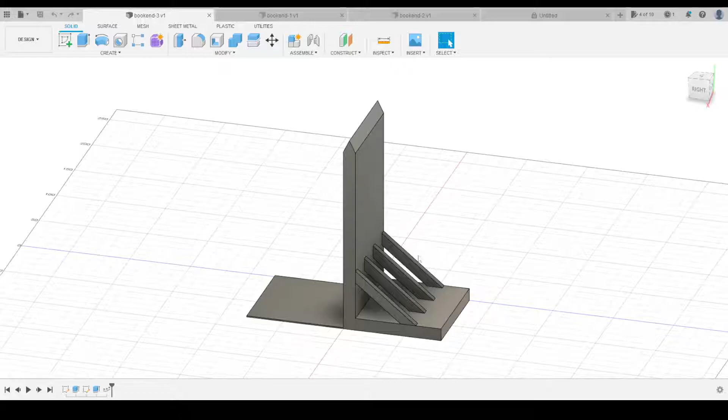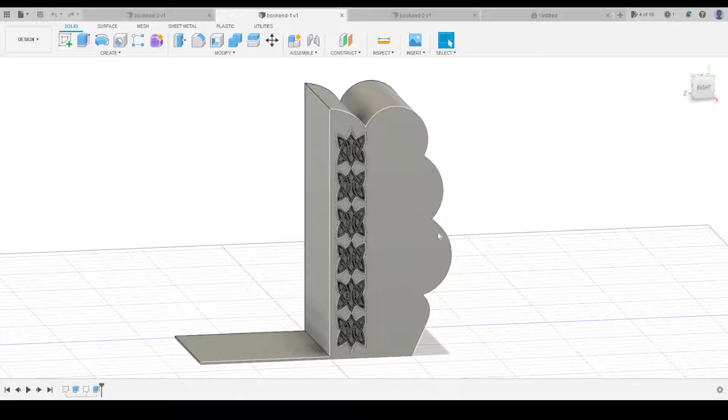I got some rectangles and squares punching out the side. This one kind of looks like a cloud. It's really just about making it big enough so that it can fit the SVG design.

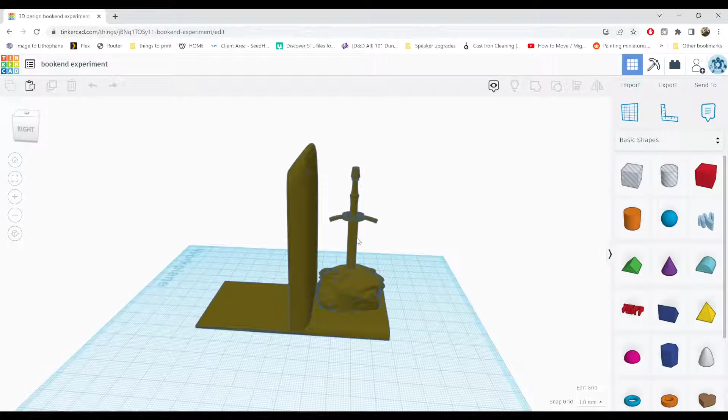We're going to start off with design number one. Keep it the most basic to start.

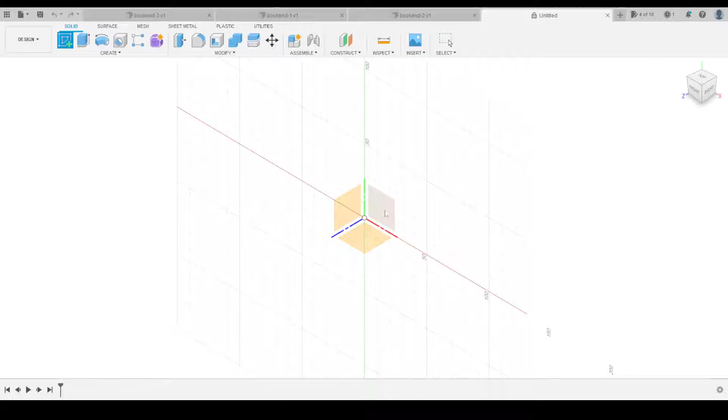So with Fusion 360 launched and at the basic starter screen, go up to Create, Create Sketch, and just pick either the left or right panel for the X or Y axis. It'll snap to this, and you'll get a grid with some measurements.

To get things started, I'm going to go ahead and select the line sketch tool, which is up at the top, all the way to the left. The simplest thing to do here is to just snap it to the zero point, which is the little black and white circle in the middle here. As you can see, the cursor will automatically snap to it once you get close.

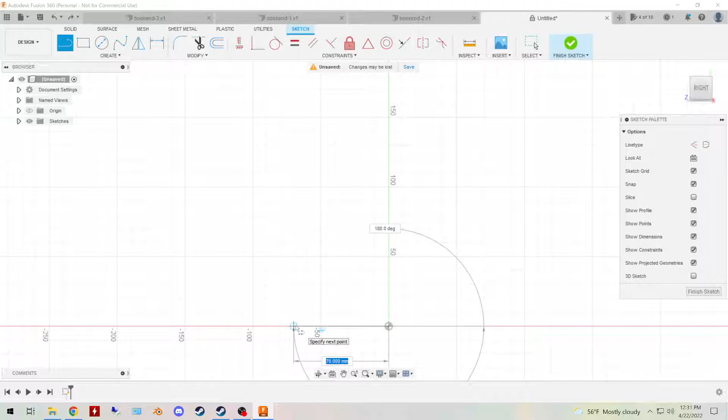Once it snaps and you get that little blue square highlighting it, just left click and we can start dragging out the sketch. I'm going to follow the red line that's going along the bottom here. You can see those numbers. To start, we want to stretch this out to something between 50 and 80 millimeters. This is going to be the flat base that's at the front of the bookend. So I'm going to bring it up to about 70 and left click.

Next, we want to bring this straight line up, but only 1 millimeter. As you can see, if you move the mouse around, it will automatically snap to that grid line going up. Easiest thing to do is just get your cursor close enough and it'll snap to it like that. Then in that text box, it automatically highlights. Just type in 1, hit enter, and we have a 1 millimeter line going straight up.

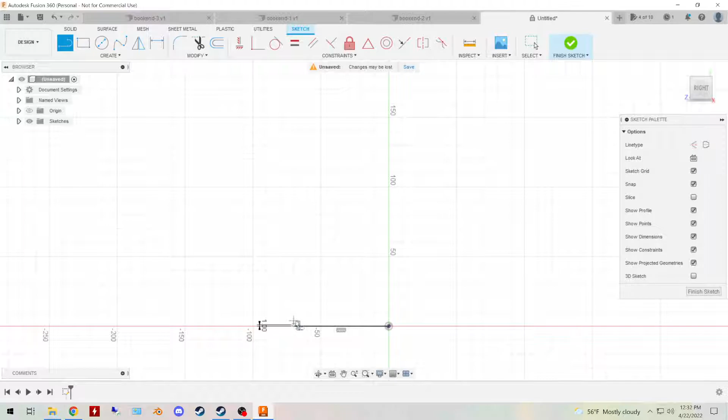All we need to do next is reselect the line sketch tool up there and snap it to the top of that little 1 millimeter line we just made. We're going to snap it to just above the point where we started.

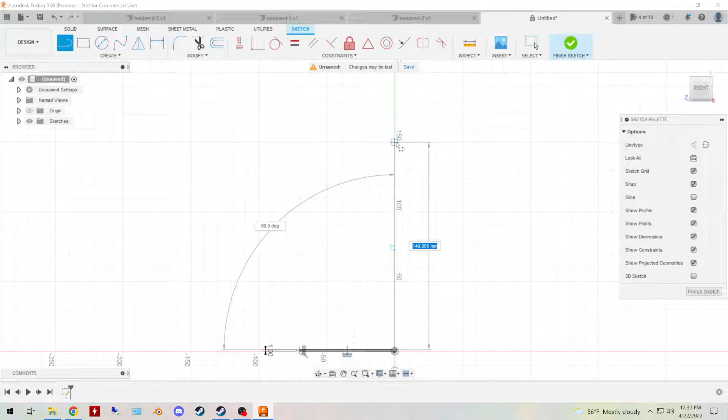I already have a good view here, but you might want to scroll out with the scroll wheel or pan up to get closer to this 140, 150 line. You do that by holding down on the scroll wheel and moving the mouse. Because what we want to do is bring this top line up to between 140 and 150 millimeters. So I'm going to bring it up to 140 and left click.

For now, I'm going to hit the check mark to pause it and say that this will be the basic skeleton of all the bookends, whether you want to do the basic one, the one where you import the SVG, or the one where you ultimately import it into Tinkercad. This is the starting point for all three designs.

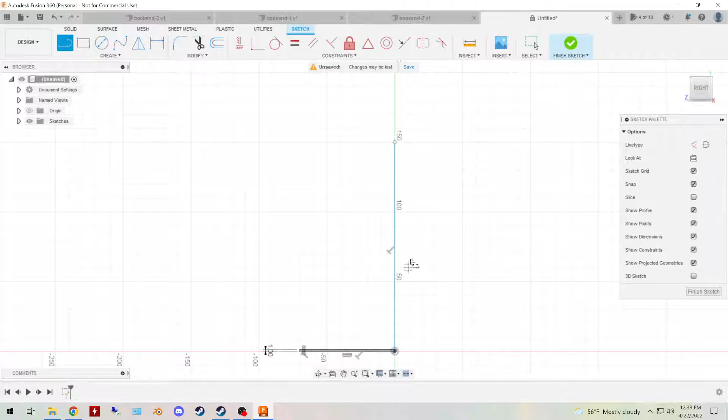So let's start imitating the first design I showed, the most basic one with a little point at the top and support beams across the side.

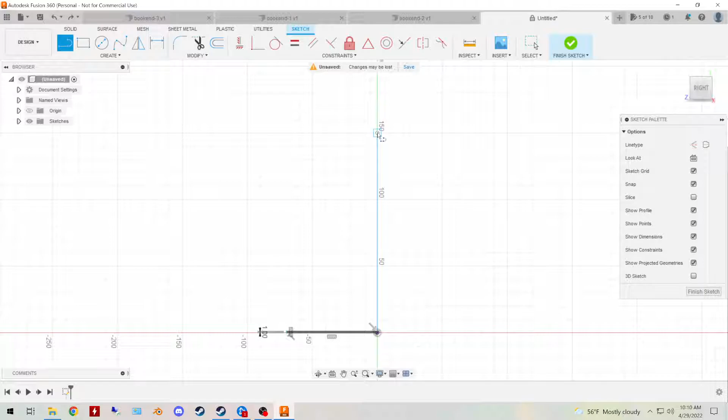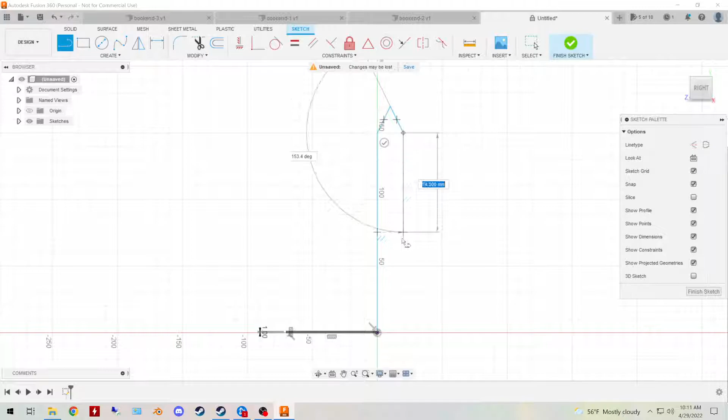I'll continue to use the sketch line and sketch out a little triangle point. Easiest thing to do is let it snap to a grid point, however big or small you want this to be. I'll snap it to the corner there, and then drag out the rest of it.

The part on the back could be as small or as big as you want, depending on how much space you want the bookend to take up. I'm just going to eyeball it. Once you connect everything in a continuous closed sketch, it will highlight blue.

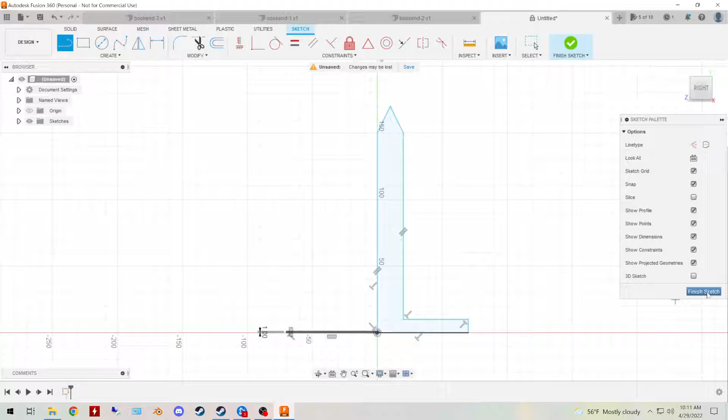Go ahead and click Finish Sketch. Next we're basically going to extrude it out, and then use the pattern tool to get those repeating support beams across the side.

Go ahead and click on Extrude. Since the sketch is the only thing here, it should automatically highlight for you. If it doesn't, just click on it, and up by profiles you should have one selected, shown as a deep blue.

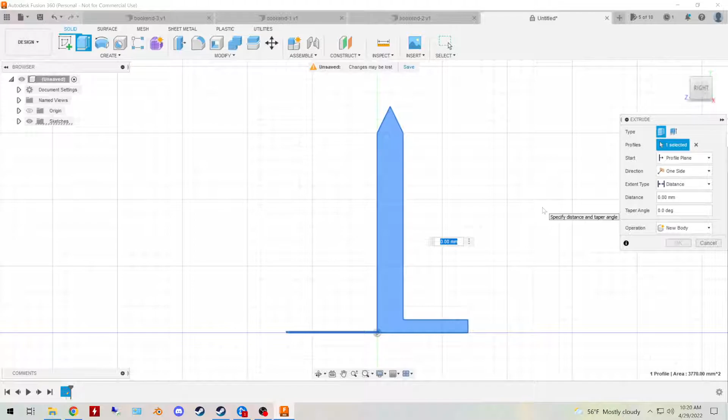Let's go ahead and extrude it at a distance. The easiest thing is to just type in the number here, but you can also shift view and use the arrow to drag it out, whatever you prefer.

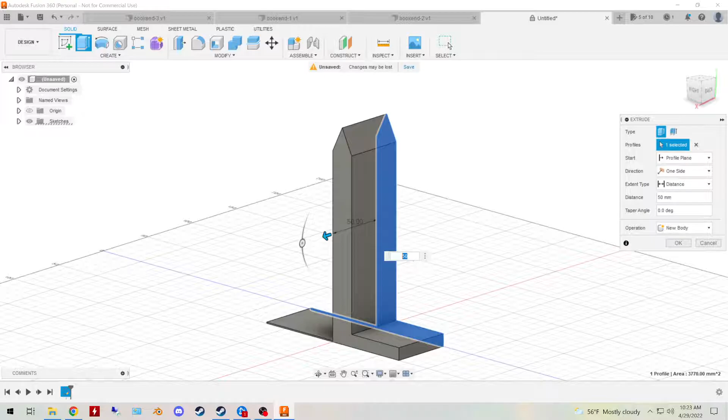I've found 80 is a pretty good all-around number for your bookend, but it can be as big or as small as you want, depending on what you're trying to prop up, since things come in different shapes and sizes. Whatever number you need, just stretch it out and type it in.

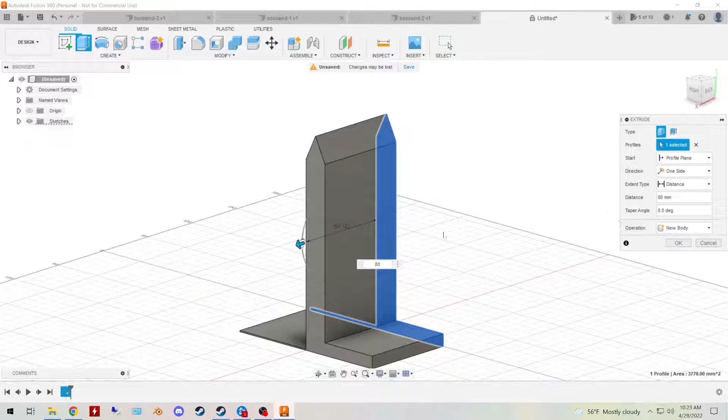Once that's finalized, just click OK, and we will have the extruded basic shape of our bookend.

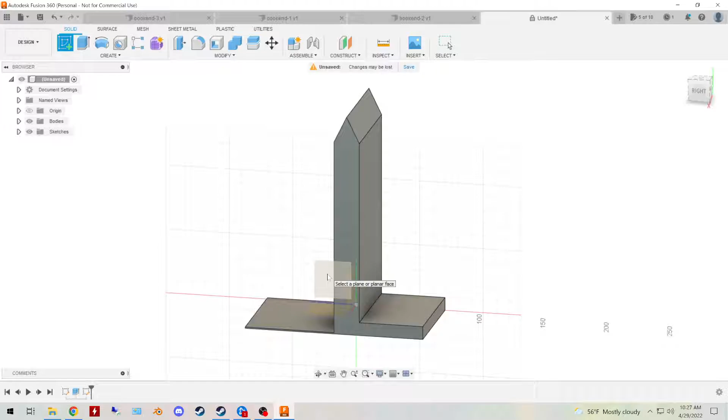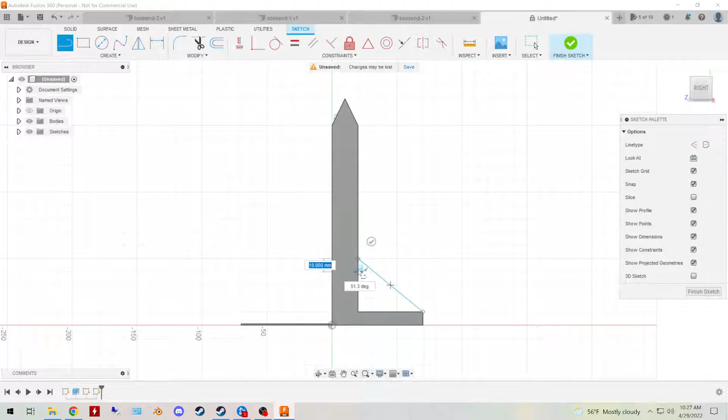To get those repeating support beams across the side, we're going to go back and use the sketch tool, selecting the side panel you originally sketched along. Hold down the scroll wheel to pan over a little, then use the line sketch tool again to sketch out a little rectangle going across the side profile.

Once we have that as a continuous blue shape, just click Finish Sketch. Now all we need to do is extrude it a little bit, and then use the pattern tool.

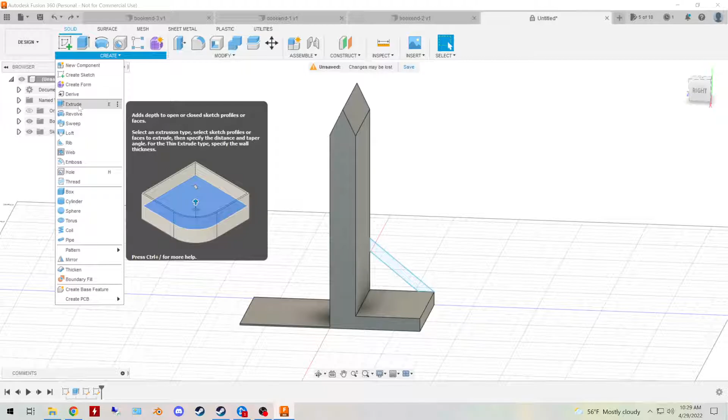We'll go back to Extrude, select the sketch profile, and type in how much you want to extrude it. I'm just going to go with 5 - it's a decent thickness. You don't want it paper thin, but you don't want it to take up too much space either. Something like 5 or 7 is probably in the right area.

Whatever it is, click OK, and then go to Create, Pattern, Pattern on Path.

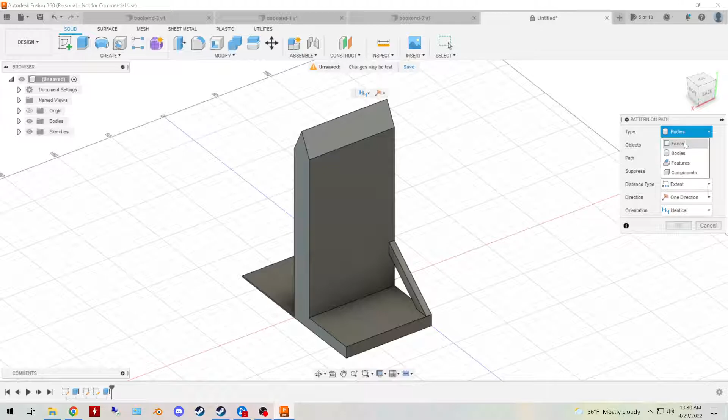The first thing we want to change here is the type - we're going to switch this to bodies, so you can select the whole body of the object. The ones on either end are difficult to select if you go with faces, so just do bodies, click, path.

We want to do this little corner path here, or this angle path. As soon as you have that highlighted black, as you can see on my screen, just left click.

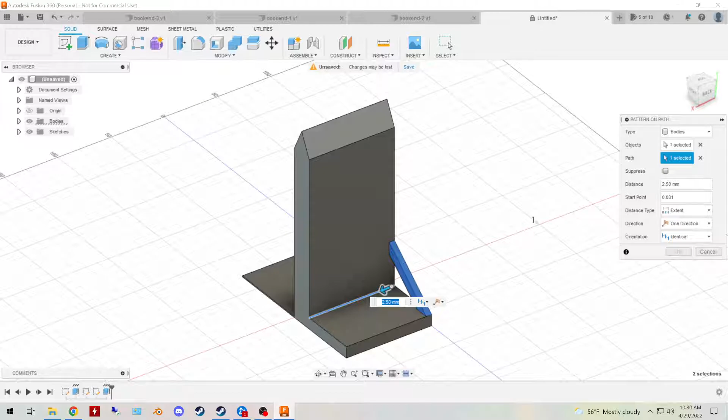Hold down left click on the arrow and drag it out. Let me pan over a bit for a better view. As you can see, we've got the distance that we're stretching the pattern there.

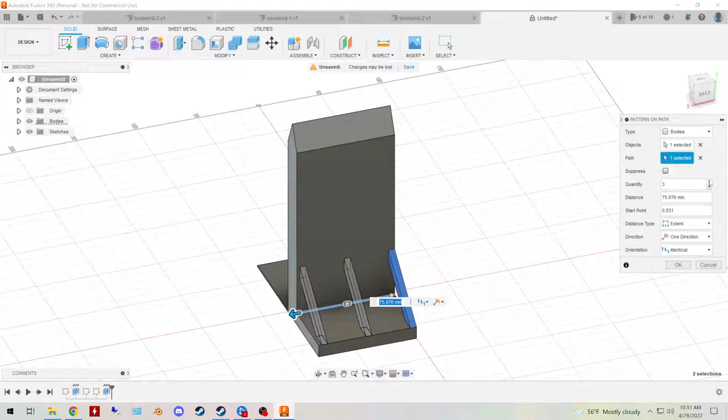Over here we also have quantity, which defaults to 3. You can do as many or as few as you want - I'm probably going to go with 5, which looked pretty good here.

You may also notice, depending on the size of your bookend, that it's kind of hard to get it to snap to the very end for a nice even result. As you can see, it kind of snaps off the side there.

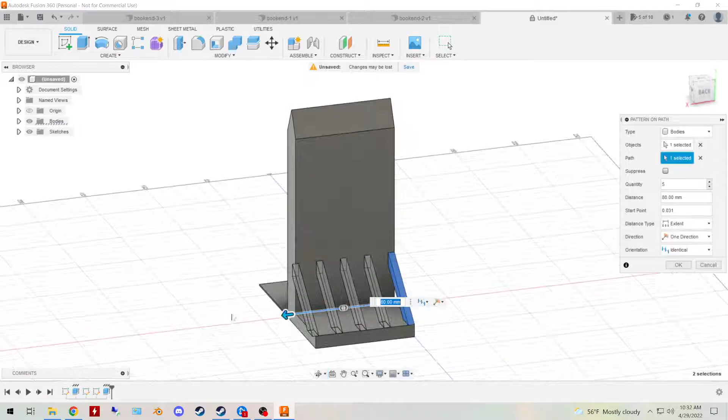So I found the simplest thing to do is just guesstimate what the number is. Sometimes you can drag it real close - I actually think that's pretty close. If I was having trouble, I'd notice that 80 is over the limit and just start typing in 79, 78, and get it how I wanted it.

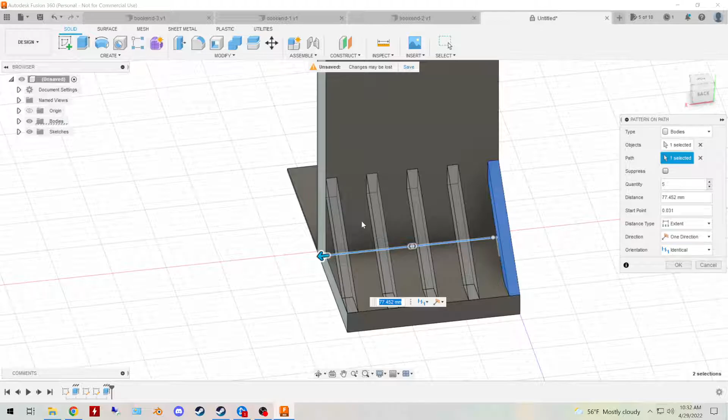Either way, once you've got the number and distance everything good to go, click OK, and bookend design number 1 is ready for 3D printing.

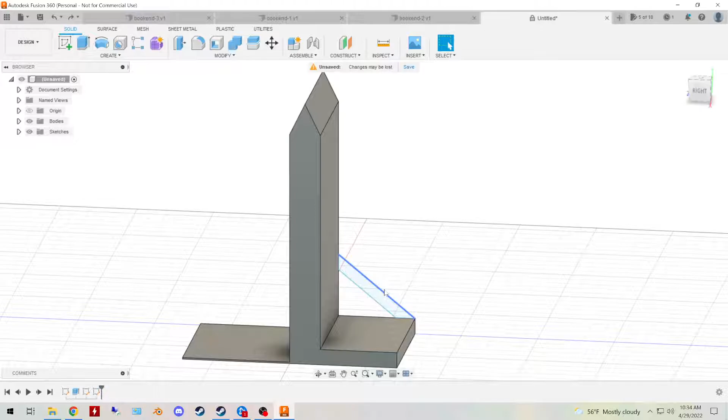With that done, I'm going to go ahead and Control Z my way back to the basic sketch that we had. One second here. All right.

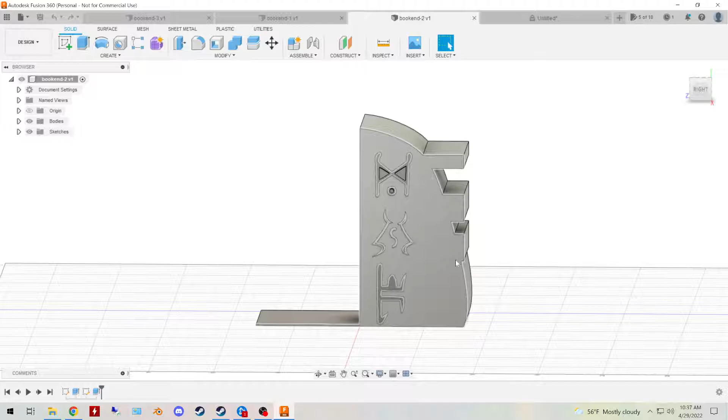All right, so here we are back at the basic starting point of the sketch, looking to imitate design number 2 here. Just kind of a more open-ended bookend, a cloud shape with rectangles. So I'll do both of those, sketching this out.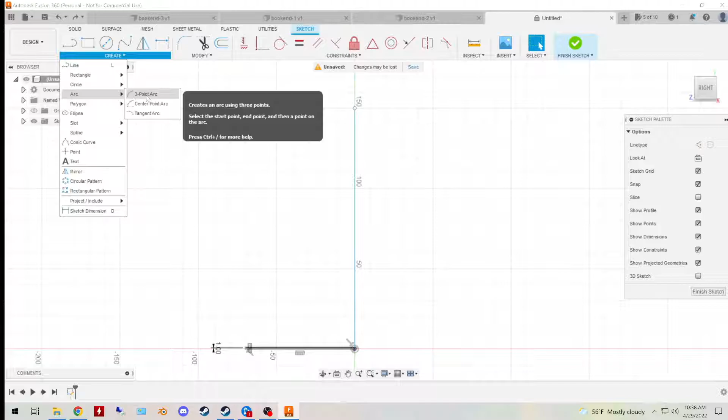Within the sketch, we can go over to Create, and to get the rectangles popping out, you're gonna use rectangle. Circle if you want more of a geometric cloud shape. If you want something more free form, I found using 3-point arcs and conic curves to be a good way to get the uneven shape on the back there.

All right, so let's sketch out the back of our bookend with a combination of 3-point arcs, conic curves, rectangles, and spline to set up those rectangles.

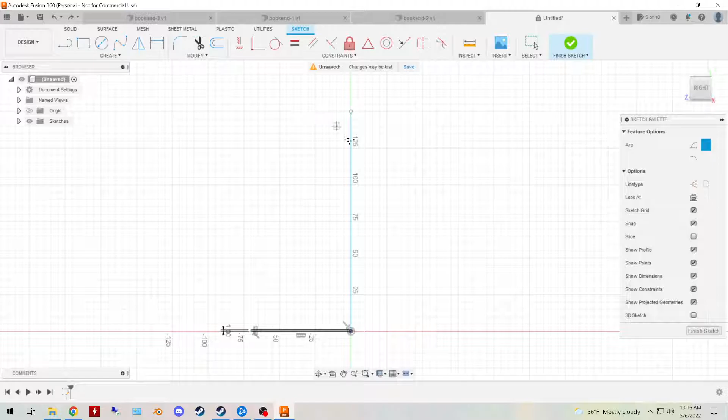I'll start with a 3-point arc, which is you click 2 points on the graph and then use your mouse to drag out the shape of the arc. I'll select the first point at the top where I last ended and just point it downwards. As you can see, as large or as subtle a curved shape as we want.

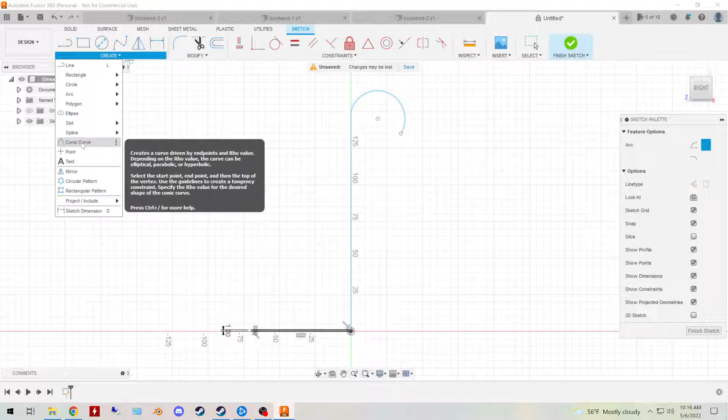Go somewhere around there. And then just to show, I will switch to conic curve, which is kind of the same idea—you make 2 points. So just do where we ended the last curve, point it downward a bit. Then we have a more free-form option when we use the mouse to drag out the shape of this curve. We can go up, down, in, out. So I'll drag it downward a little bit.

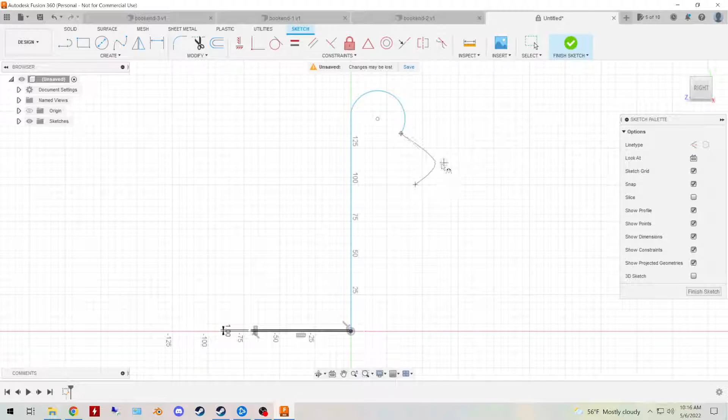And then we have this arrow as well. We can make it more of an even curve or pull it out more towards a point. Once you have that finalized, just hit enter and it'll lock it in.

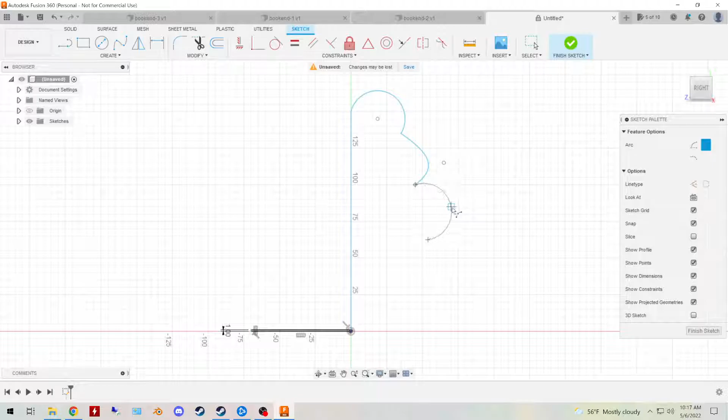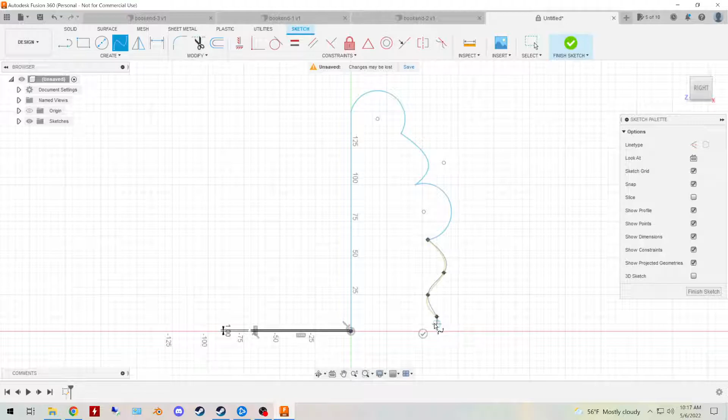I'll do one more arc and then switch to spline to get the rectangles coming out like with the other design. So we'll go spline, fit point spline, and then you can just drop points, move the mouse around. Once you get it how you want, you can click. And once you get to the bottom red line, you can tick the check mark to finalize the sketch.

And then we can go ahead and make some 2-point rectangles to jut out the side here, which much like the arcs, you click once, and then click again on a different point—you can see we're dragging out the outline of the rectangle here. You just click again when you have the shape that you want.

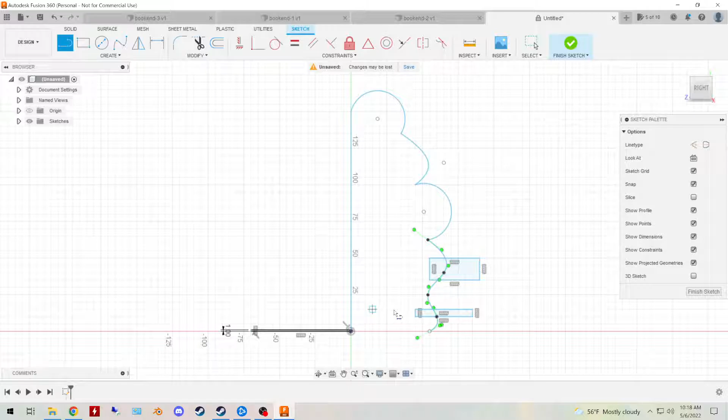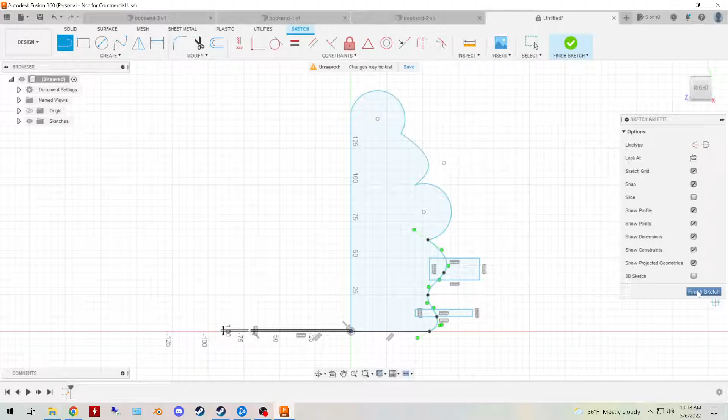The last thing we need to do is just close the sketch together and extrude it. So I'll switch to basic line, bottom, and then to the point where we started the sketch. That'll highlight blue to signify that it's all closed together. And we can go ahead and click on Finish Sketch.

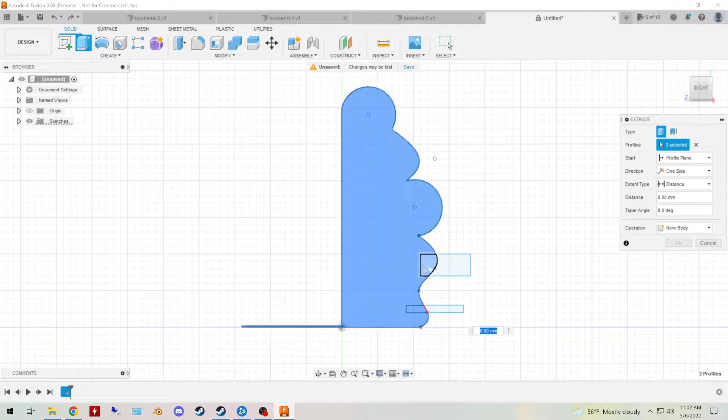And we can go ahead and extrude this out now. So Create, Extrude, and then just be sure to hold down Shift and select any additional faces. When you mash sketches together, they kind of separate, so just make sure everything is selected. Go ahead and extrude that out to your desired width, and click OK.

We can go ahead and insert some SVGs now. I will not go over how to create your own SVGs in this video—I cover that in my designing your own coasters and magnets video. I'll leave a link in the description below. The section for creating your own SVGs is maybe the first 10 or 12 minutes or so.

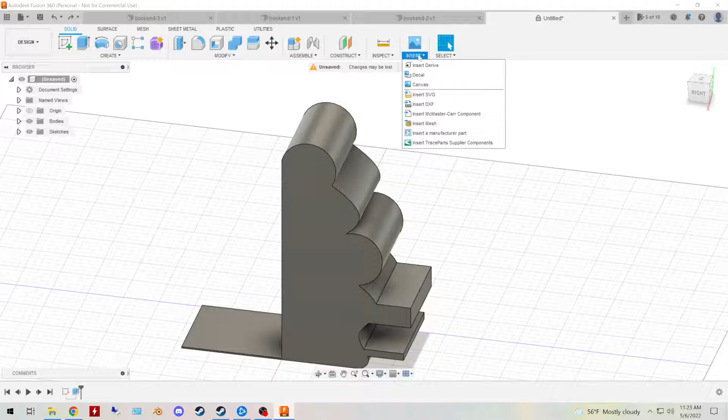All right, so inserting the SVGs: Insert tab, Insert SVG, and in all likelihood they're saved to your computer somewhere, so click on Insert from my computer. You can see I have a couple here. These three are the rune symbols, and this is the Celtic knot design. So I'll insert a couple of these.

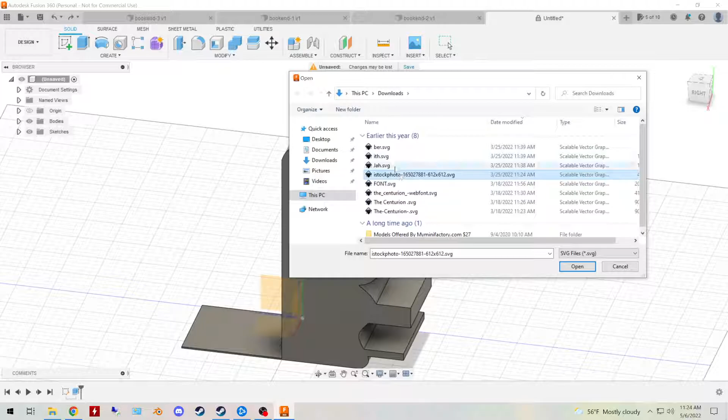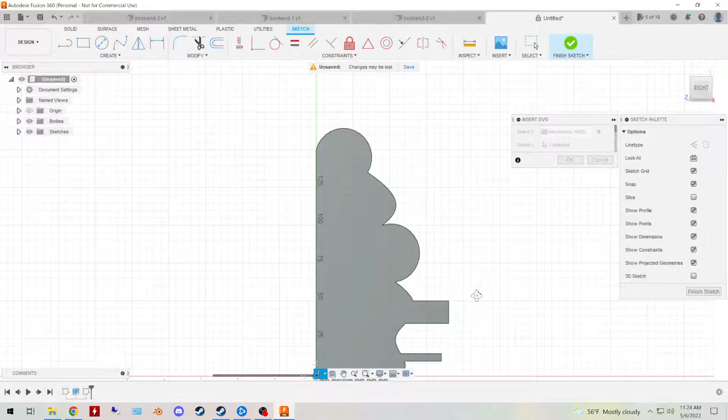I'll insert this one. And rather than selecting one of these axis planes, you can actually select the front face of your bookend, and it will stick to it, making engraving or embossing much easier. The only downside is it can get a little tricky to locate exactly where it inserted your design. Mine was towards the bottom.

And so I'm going to use these arrows and this rotation wheel to rotate my design around. And this crescent symbol—you can hold down left click on that, move the mouse, and you can scale it up and down. So I'm going to give it a good size.

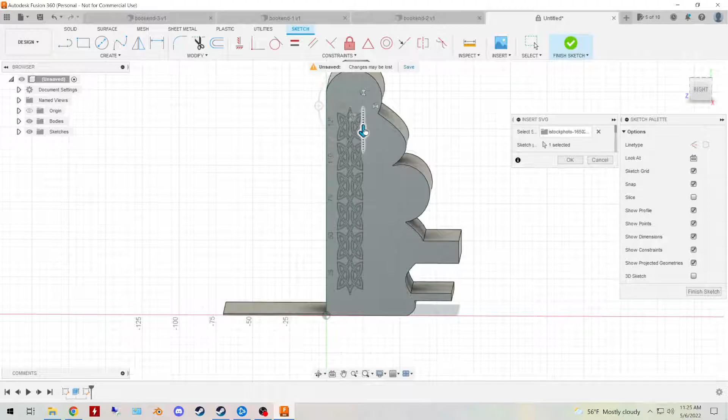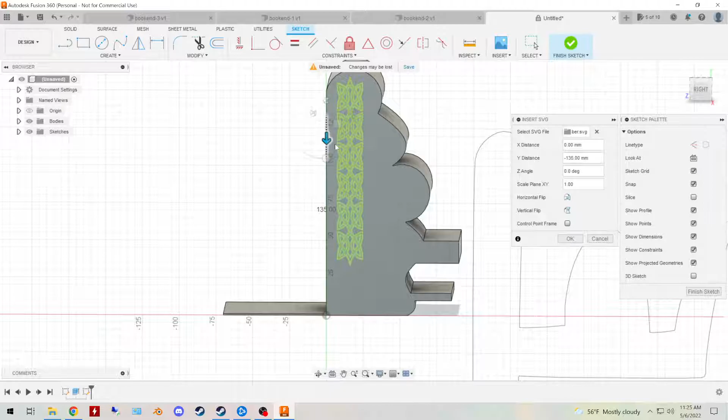Push it towards the top, and I'll click OK. For good measure, I'll insert one more here, insert this rune. As you can see, this one is significantly larger than the other one, so let's scale that down.

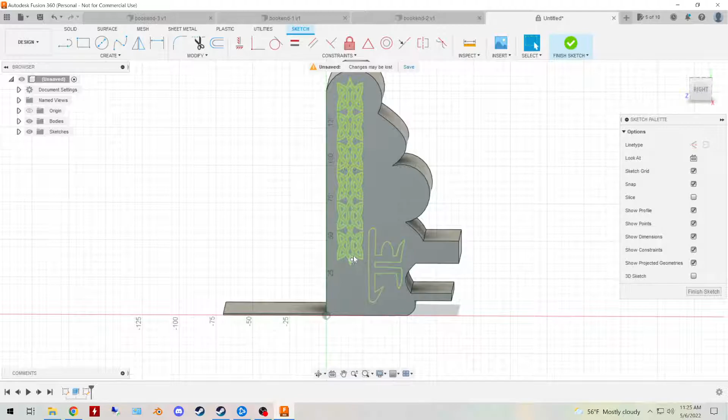Stick it in right there, maybe down a little bit more. Alright, then just click OK. Once you've got your designs in place and sized up, just click Finish Sketch, and then it's just a matter of selecting the faces and extruding or punching them inward.

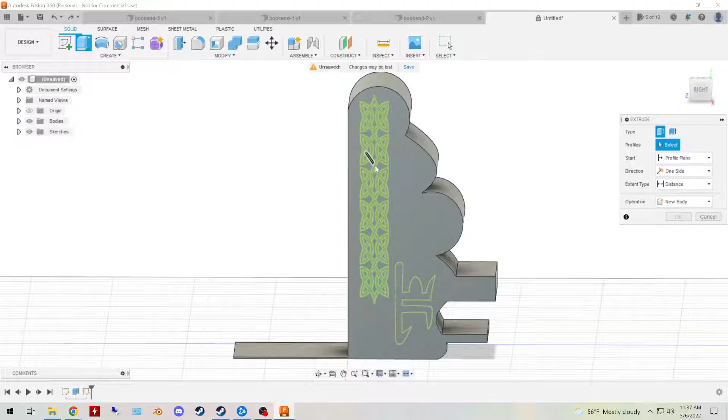We can do that now, so I'll go to the Extrude tool. It'll ask me to select a profile or face. Depending on your design, it might be kind of tricky to get the whole thing selected all at once, as you can see here, but eventually you should get to a point where it highlights the whole thing for you. Then you can left click, hold down Shift, and select this other one as well.

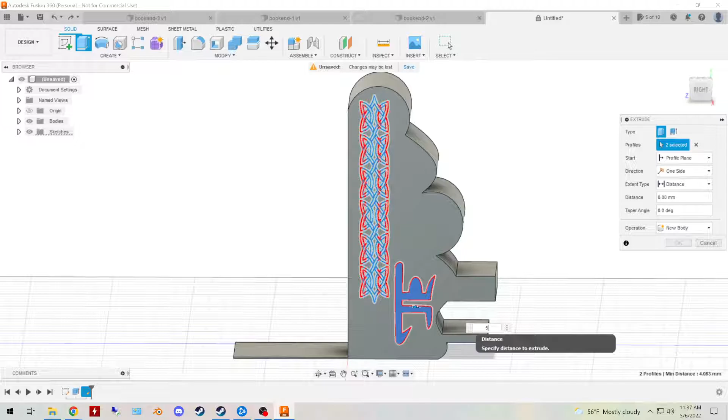The easiest thing to do from here is to punch in your distance. So if you want to emboss it on the bookend, sticking out, you can type in a positive value, and it will extrude outward.

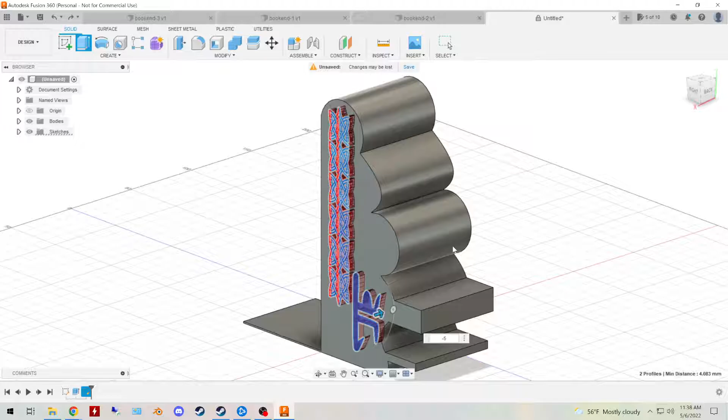And if you want it engraved, you would just do a negative value, so we'll do -5. As you can see, that engraves it into the side. Whichever is your preference, once you have the positive or negative number punched in and you think it looks good, you can click OK. It'll probably compute for a little bit, but it will then either emboss or engrave your designs into the bookend.

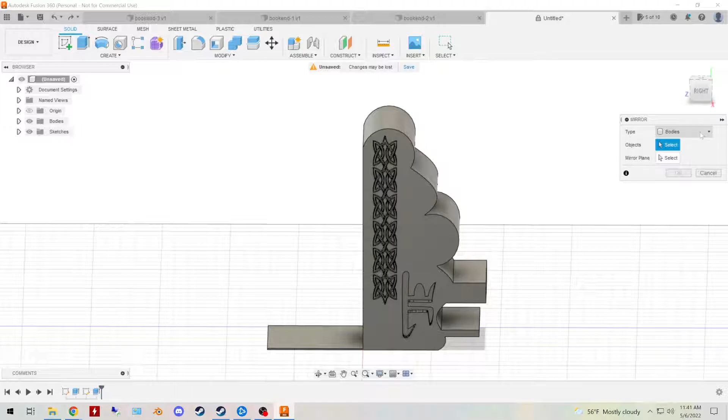If you want matching bookends for the left and right ends, that can be easily done. Just go to Create, Mirror. Make sure type is set to bodies, it'll automatically select the whole thing. Then on Mirror Plane, just select either the left or right axis plane here. I'll do this one. Last step before clicking OK, make sure this is set to new body, otherwise it will merge those objects and you'll have to undo everything. Yep, bodies, objects, plane, new body, OK.

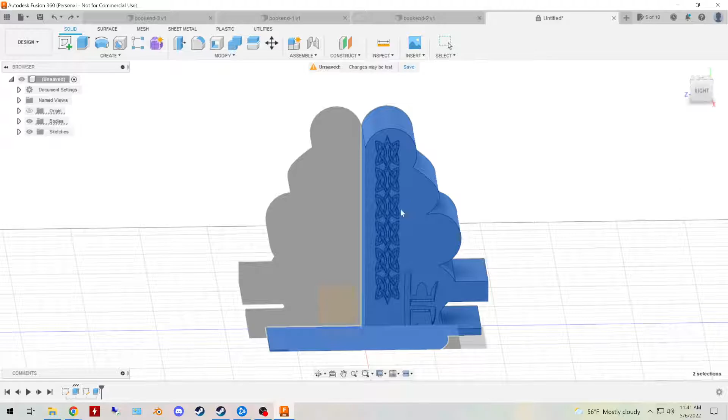Then all we have to do is use the four-sided arrow here for move. Just click the mirrored copy, and you can move it to the side. As you can see, we have matching left and right bookends.

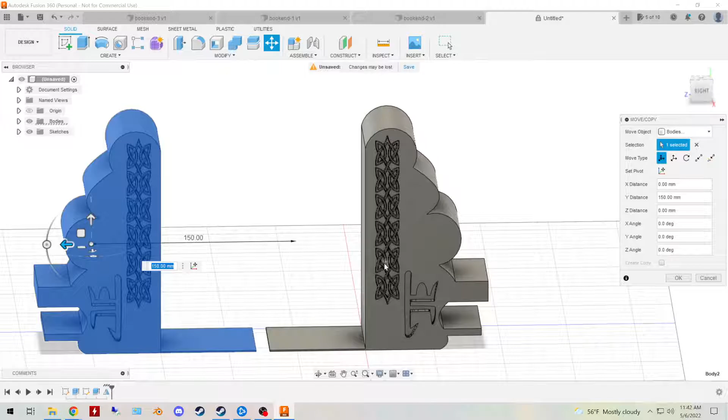Obviously, if you want the mirrored object to have a different design on its side, you would need to mirror this before you put the SVGs into place. We'll go ahead and cancel and do that for now.

As for the last design, I won't really go over how to make the base design of that, because you should know how to do that already. It's just designing this without the little support beams, and then you just export and import into Tinkercad.

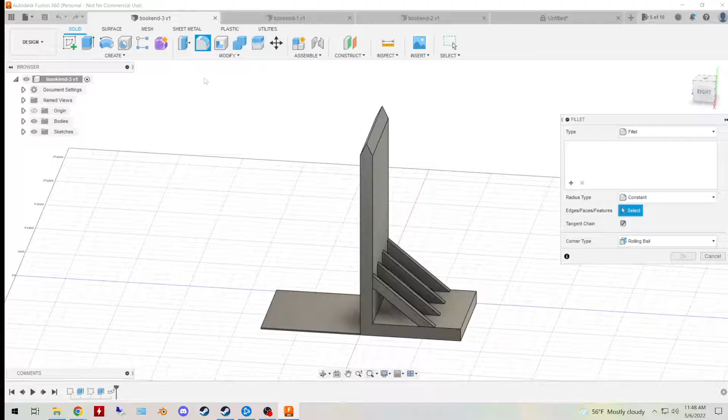One last thing I'll say before potentially exporting: a good tool to use, good tools rather, are the fillet and chamfer. You can pretty much select any edge with these - that's an edge, that's an edge, that's an edge.

Click on one, and then use this arrow to round out or taper off an edge. Chamfer.

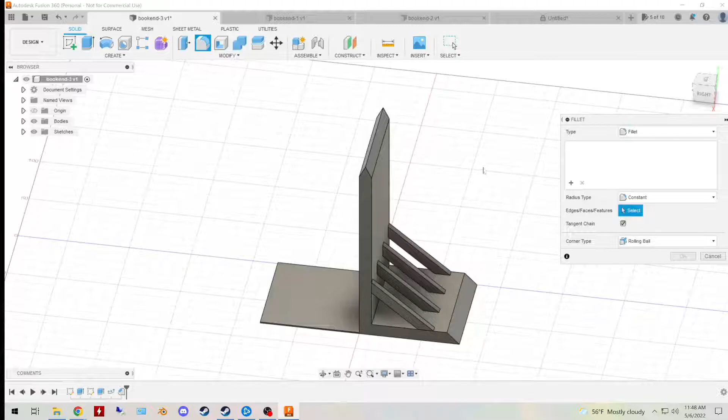And if you want symmetry, you can also select multiple edges. So I'll select that one, hold down Shift, and do this one as well, and kind of round off those edges a little bit.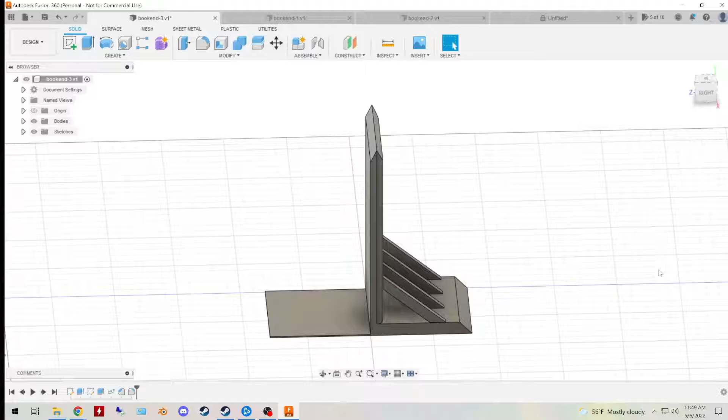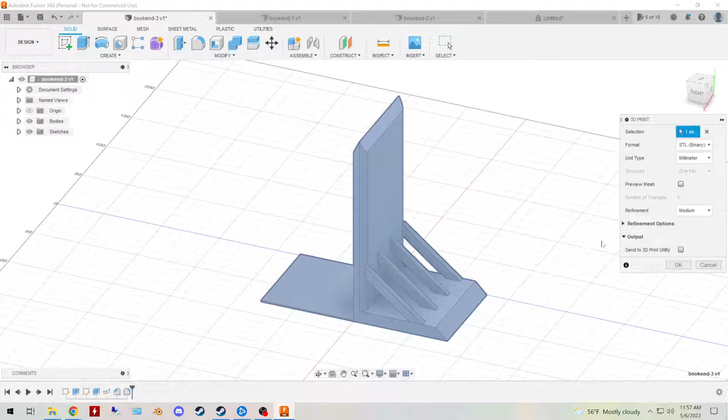However you design it, once it is finalized, we can export and import into Tinkercad. So as you might remember, we'll select the whole thing by clicking here, File, 3D Print, make sure that's unticked, click OK, and it'll save it to your computer.

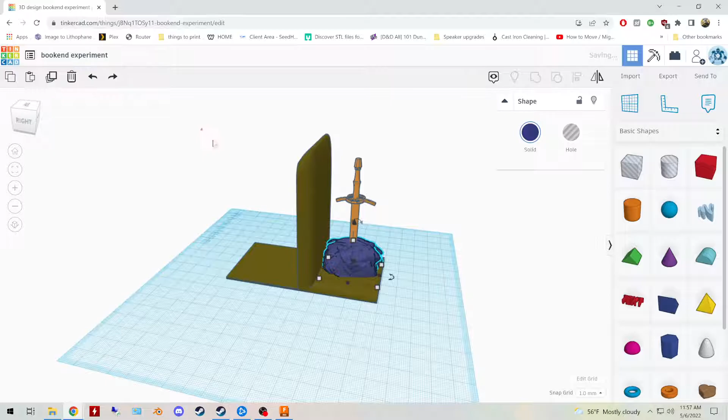Then we can go into Tinkercad, import it, and this is the design I had. All I really did is I went on the internet and found a design for a sword, chopped it up a little bit, found a design for a stone, mashed those two together, and then mashed that together with the bookend, grouped everything together. Simple as that.

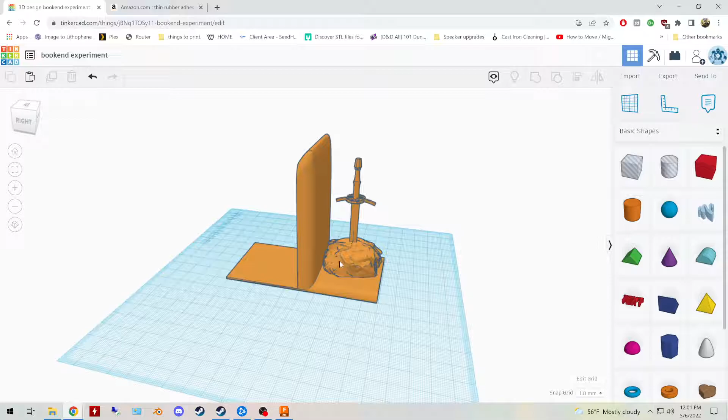One last thing to note before finishing up this video: these 3D printed bookends, like most 3D printed things, will be pretty weightless. So if you want these propping up decently sized books with a decent amount of weight, it might be a good idea to head over to Amazon, eBay, a craft store, or wherever, and just look for some thin rubber adhesive pads.

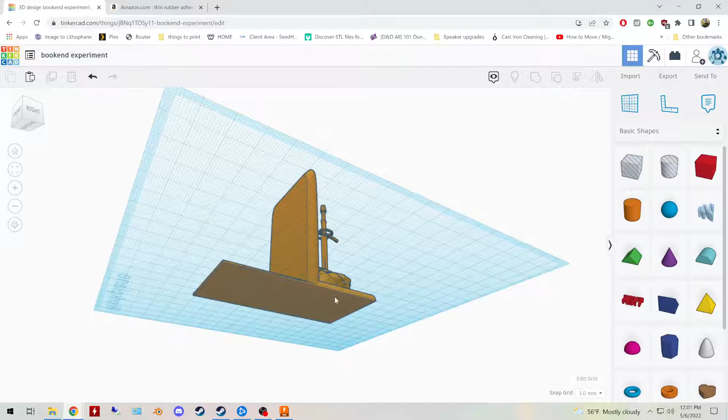You can take the adhesive off and stick those to the bottom, and that'll keep your bookend nice and firm and in place.